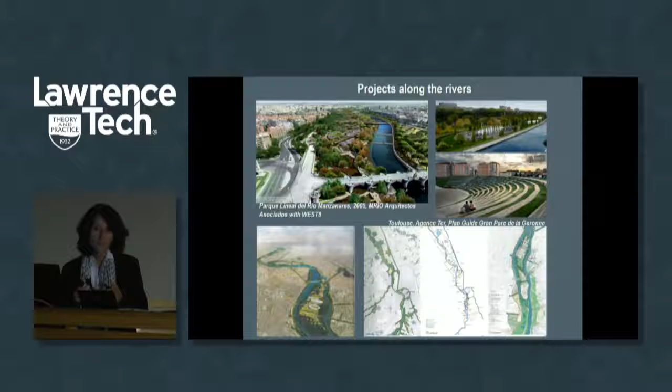They're almost finishing it. Also, the Minneapolis Riverfront Design Competition in 2011 tried to recover this question. A lot of American cities have used riverbanks for industrial settlements, and that's why now they are trying to do something different. Pittsburgh is a great example, which is why I'm there now, but all around, the reuse of these industrial sites doesn't mean just reuse of the buildings, but also of the land, which is very important.

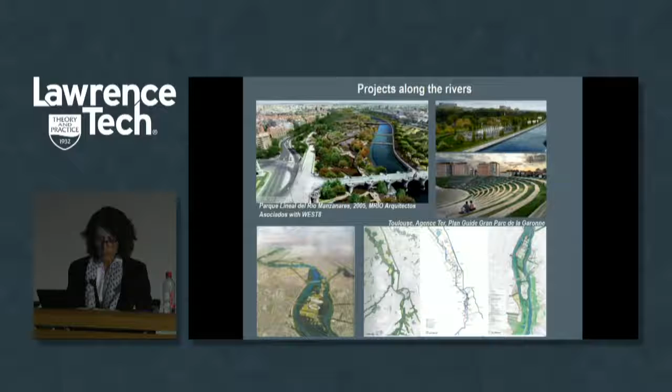Other examples - there's now an international competition called Réinventer la Seine, on the Seine in France, the main river of France. They have 41 sites which are online now, happening this autumn, and these 41 sites along the river are an occasion to work on it. They call groups - competitors, architects, but not only architects, also landscape architects, economists - putting people together to try to solve some problems along the river, like industrial sites, parks, infrastructure, things like that.

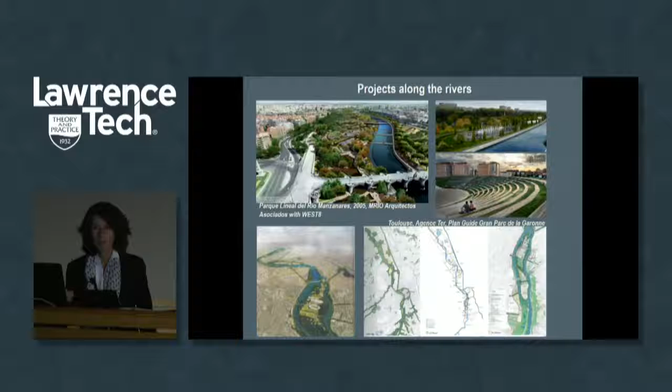One big example has been the park of the Ruhr in Germany, which in Europe is well known - I don't know if you know that. This is a huge project that has been going on for like 20 years, which really transformed a region that was a huge industrial region, and now it's really increasing and is even good for, I would say, tourism. A lot of tourists are going there, and the landscape has changed a lot.

So, where the work I've done is in the region of Piemonte. Where is the Piemonte region? There's some basic geography for me, but I know it's different for you. We are just beside Milano, northwest, beside the River Po, our major river in Italy.

Some pictures to show you how Torino is - this is our region, on the right side you can see it, and this is the main geography. Torino, the town itself, is now 900,000 inhabitants. The metropolitan area, before, with Fiat, we arrived at 1,100,000 - sorry, 1,100,000. But the metropolitan area is more than 2 million people, and for us, metropolitan area means all the small cities that are around Torino. This is on the map - you can see just Torino, but with the metropolitan area. We have the hills on the right side, and the Po that is on the right side, and now we'll show the other.

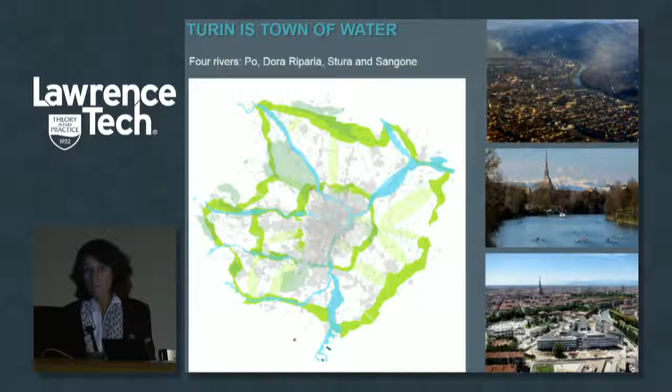This is the system of the green system, and what's important in Torino is that we have really a whole story, I would say. We have a big system of parks - you can see in the map these wonderful castles that were the king's place to go to hunt in vacation. On the top you can see Venaria Reale.

In the last 20 years - you have to imagine Torino was considered an industrial town, so nobody cared about the heritage, it was not so important for us. Everybody came from the south of Italy to work. The Venaria Reale you can see now - it's like not Versailles, but kind of, really big with all the gardens restored. But it was abandoned. There was nothing there, nothing, closed.

With that, we changed a lot. Now it's a UNESCO site. The one in the middle is Palazzina di Caccia di Stupinigi - it's like a small castle for the queen and the king. This was property of one of the main hospitals of the town. And down you can see the River Po.

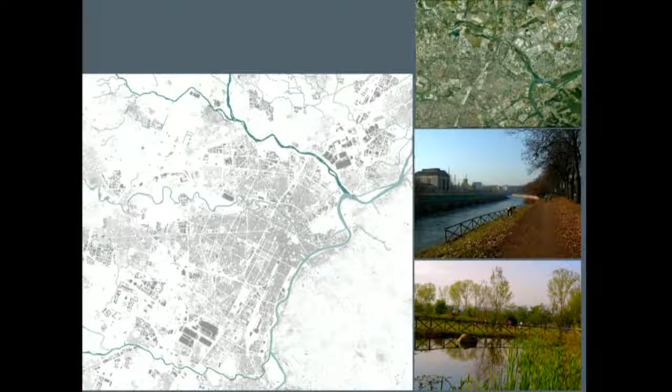This is really the figure ground map of Torino, where all the rivers are very clear. On the top you can see the Stura, after in the middle the Dora, and down the Sangone, on the right side the Po. Everybody's going to the Po.

You see here, for example, this is the map of the north part of Turin. This is the Dora that is inside the town. And this is along the Sangone River that has an urban part, but also really a part that goes into the countryside.

This just to explain you a little bit about the town. Torino is a Roman town with a very simple street model that has been transformed in the medieval time, not too much, but what was very important for us was the 17th century and the 18th century.

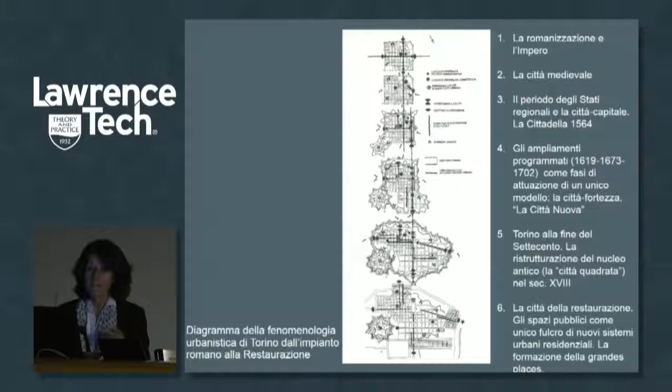So the Baroque - from the city it becomes like from the citadel, that is in the 16th century. The extension programmed in 1619, from then until the beginning of the 18th century, this became the new town Turin for the king. The king was the king of Piedmont and Savoy, part of France.

But you can do the expansion of the city until the restoration time - that means after Napoleon. Napoleon came in Torino, so he destroyed all the fortification, of course, like in all the towns in Europe.

This is the Baroque period, in which you can see the relation - the town was very small, and all the parks that now you have seen in the other map, they are close to the town now. They were far away then. They were in the countryside.

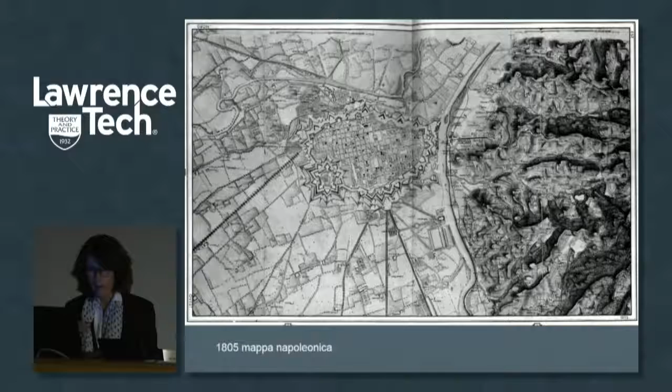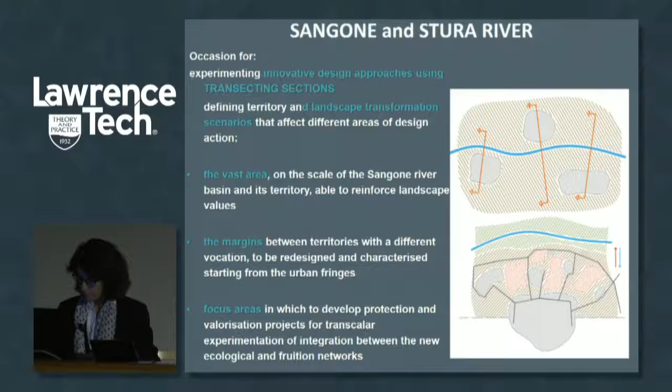So this was an opportunity to study some complex dynamics at landscape, urban and architectural scale, and of course experimentation with the two scales that we discussed already.

This is just to explain how complicated it was, because this governance tool was promoted by the province of Turin, which has a provincial territorial plan. So we have a comprehensive plan, and after that a territorial plan at province scale. But the law changed last year — we don't have provinces anymore. The biggest provinces in Italy are transformed into metropolitan areas, so the borders are not like they were before.

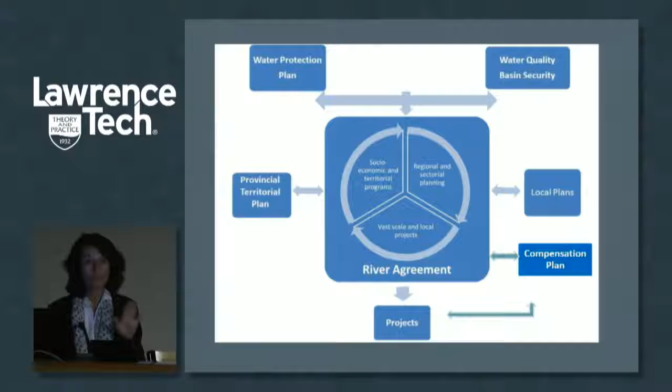So you have this problem: water protection, water quality, basin security, and the local plans all together need to be discussed. Now all these public offices, I would say, never talk together, never talk. I don't know how it is here, but they don't talk. I went to Pittsburgh, to the Urban Development Authority, and then they have the planning office, but actually they don't talk. Also in your town it's the same. We have this huge system, but nobody talks at the same table.

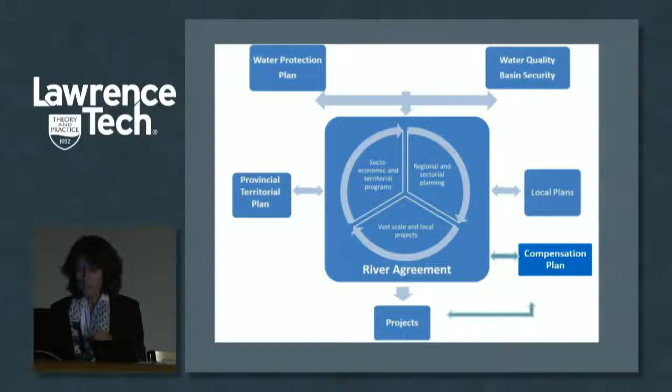This was important for us, because at the end, now we will see — so what was the methodology?

They said, okay, why don't we do a workshop with the students from last year? But there were not only architects — we had architects, and architecture and urban design students. We discussed the terminology with Philip; I know it's architecture and urban design for you, but for us it's still a little bit different. And we also had students of landscape ecology.

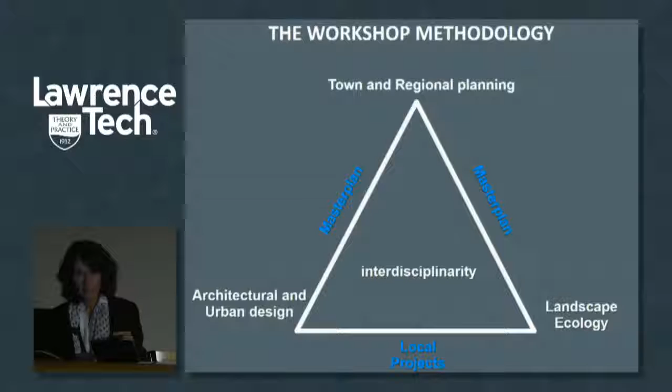Together with the town and regional planning department, we did this workshop. The tutors were me, my colleague from urban planning at the Politecnico, two professors of ecology from the university, and a tutor from the administrative office. This is a very strange thing — real interdisciplinarity, not rhetorical stuff, but really applied.

And putting together the idea of a master plan — because of course the planners will say, okay, we'll do a master plan. But it's not something that can be done from above. It's something you can discuss with the people.

This was a very long process, two years long — it takes time to talk, even in schools, I mean elementary school, middle school, high school, discussing about the river, asking what would you like to see here. This is part of the population that participated in the project too.

So these are the results. After the students participated in this workshop, they did a competition, and they had a prize from the province of Turin. With that, they had free bus travel for one year all around the town, and the publication for last year's students was very good.

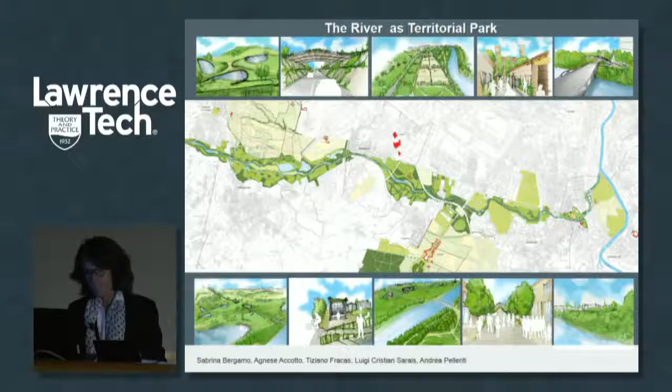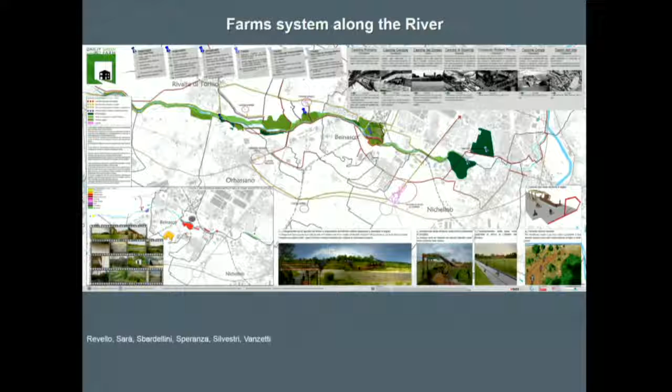This is completely different — this is the first one, and you can see all the views they've done and things like that. Now I'll just show some of them. You can also see the difference, because there were ecology students studying different subjects, so for the farm system they studied it as a park, linked together.

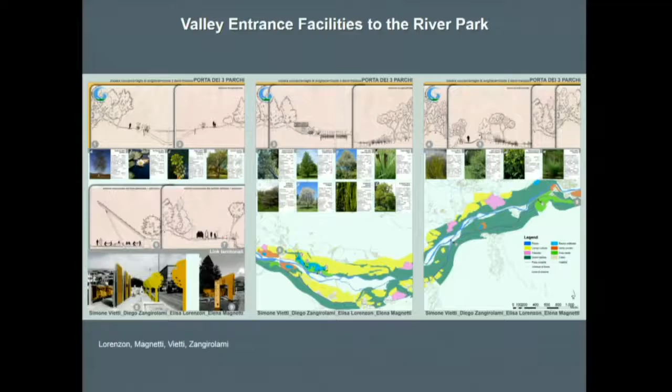Ecological network and settlements, valley entrance - that means you're entering the valley, so who noticed that? This is a community that has a different way of acting with the land, with the buildings, with everything.

These were more architects, so they studied typological studies, margins projects, like boundaries, and how to relate to the town in the last part of the river, how we can act with that. We have to keep these boundaries, or now the fact that the permeability is much more important, and in which way we have to regulate it - we have to give some guidelines for the project there.

At the end of that, they asked me and my colleague to do a master plan. This was kind of professional work, between university and professional work, because they said, okay, now we have some ideas, but we don't know how to put it all together. Things like that in our office take like 1 or 2 years. We did this in 2 months.

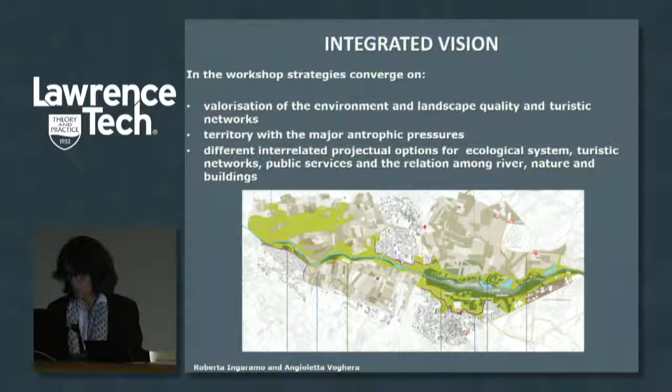We worked a lot, but this was really useful because just 3 months after we finished - this is just a part, this is the master plan. This plan, I don't know in feet, but they were 20 meters long, because the river is really long. Now you see it looks like a drawing, but it's 20 meters long with all the details inside.

What we actually did is not to say it's finished, but to say what is done, what can be done in the future - so open discussion also.

When we finished that, some of the small towns around the river received huge financial aid from the European community for another project that had been going on for 10 years, called Corona Verde - a green boundary around Torino. And they just wanted, you know what's normal in European communities - this inquiry, they wanted some answer in 3 months.

Okay, who has a project? Who wants the money, like that? So the small towns that were near the valley, they had a project. They were surprised. There's one mayor of this town that now, when he calls me, it's like Jesus Christ for him - like, you saved me.

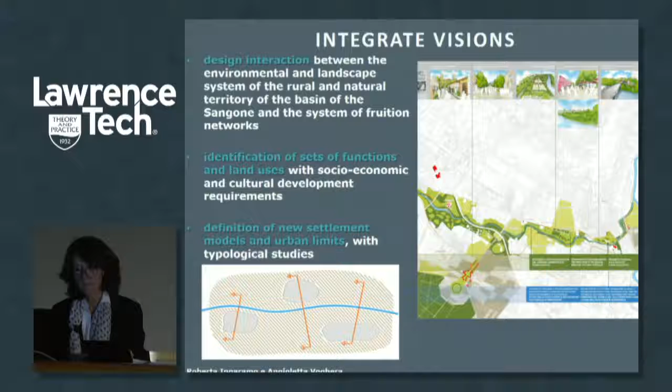This is just the implication of the work. So we integrated the vision, design interaction, identification of sets and function and land use, definition of new settlement models and urban limits, defining a complex strategy of end projects.

This is a question of how important the strategy is. So what we use is this integrated multi-scale project - we call it that, it sounds good for us - based on integration between the disciplines of architecture, urban design and planning. Not the planner on one side and the architects on the other, but together we try to do that.

With no scale limits, so the scales are connected and we can apply to extensive areas, and we try to overcome the hierarchical vision of planning and urban and architectural design - before you plan and after there arrive architects. No, it's not like that. It doesn't work, because if the planner does the plan without thinking about the architecture, it's going wrong. I mean, architecture is also urban design for me.

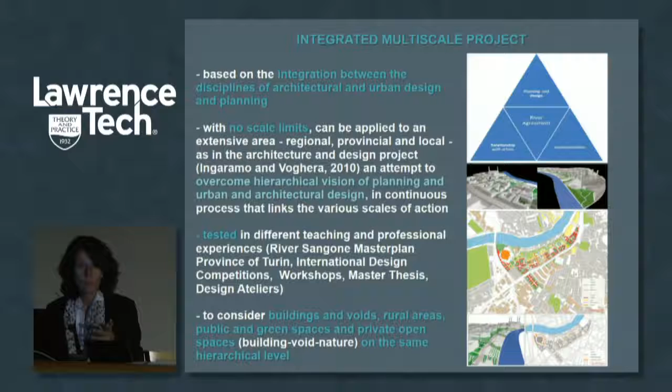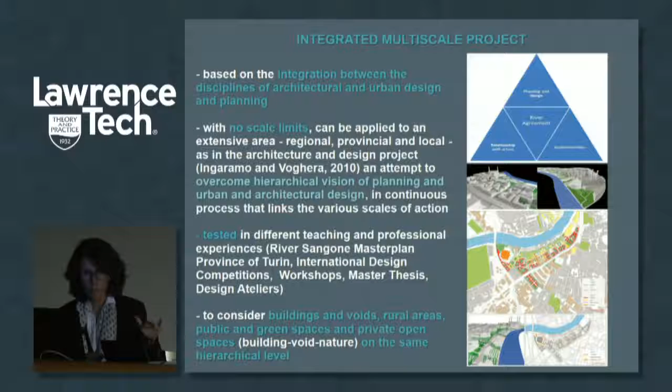It's wrong, the process. And another thing, we tested this in different teaching and professional experience. Now I will show fast because time is passing. One important thing was to consider buildings and voids, rural areas, public and green space, and private open space on the same hierarchical level. It's not only architecture first, where we are the architects and we do our thing, and the rest, I don't care about it.

But what I noticed also is in Pittsburgh, you do a project, and after that you just do a little bit around it, and then the street - who cares? It's after, no? Here in Detroit, the situation - today I went around and I'm really surprised. I knew already, but to see it is different. You have so much land that it's going to be hard for you, and I don't know what you're going to do - really, it's very difficult.

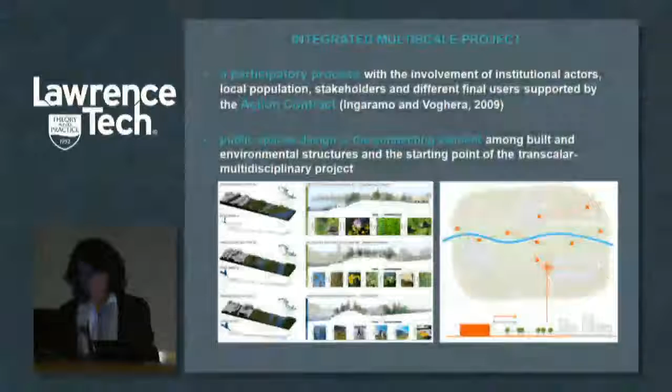So it's a participatory process. Public space design is a connecting element - it's very important. So we use two tools. Which one? The action contract.

There is a participatory planning instrument useful for supporting the public and private decision-making consultation process. Put together not only the public, but also the privates. We discuss together, we try to do a contract between us that is voluntary, of course. It's not prescriptive, but it says something.

And transecting section is like a tool, really operational, that's used to correlate various elements - also because people who are not in the field also have to understand.

This is a bit of re-examination of experiments like Patrick Geddes, valley section, and transect planning. Different, of course, completely, but I put that just to suggest where it's coming from, which literature.

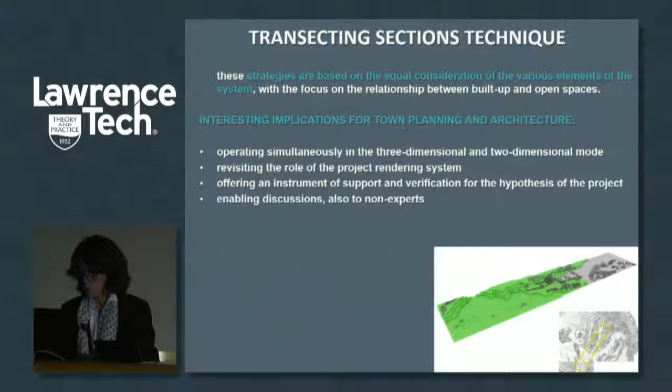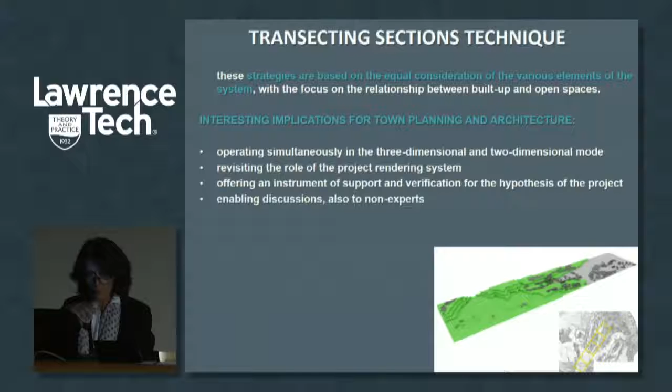The transecting section technique revisits the role of the project rendering system. You see not only the buildings, but all the land, the section, and the relation between the parts, offering an instrument of support, verification, and enabling discussion, also for a non-expert. They see how it was before and how it can be. You can change things, discuss and change.

So the method—now I'll show you some experimentation since time is passing fast. This is an ASP project, meaning we have a special school between Politecnico di Milano and Politecnico di Torino, in which 90 students apply each year.

They are the best, they have to be the best, they have to have really high marks to get in, from engineering and architecture. And this engineering means also economics engineering and all this stuff. Architecture, design, landscape—together they do special projects.

There's some experimentation on that, so they did different things, like experimenting on evaluation, and also waste treatment. They try to assess the sustainability of the projects, or waste treatment, or a valorization platform. I know for you the term valorization isn't useful, but it means adding value for us.

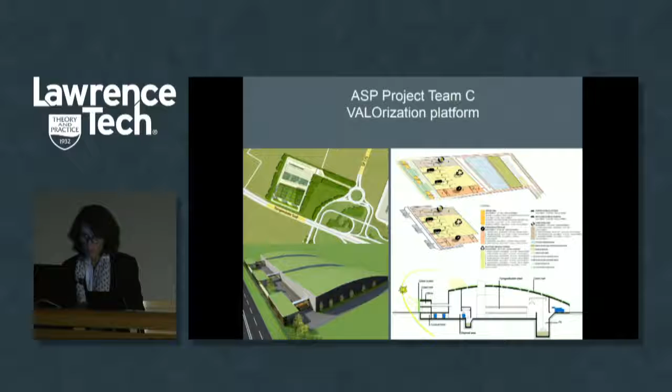All these courses are in English, the teachers are in English, they come from abroad, and they do projects and courses. It's very interesting.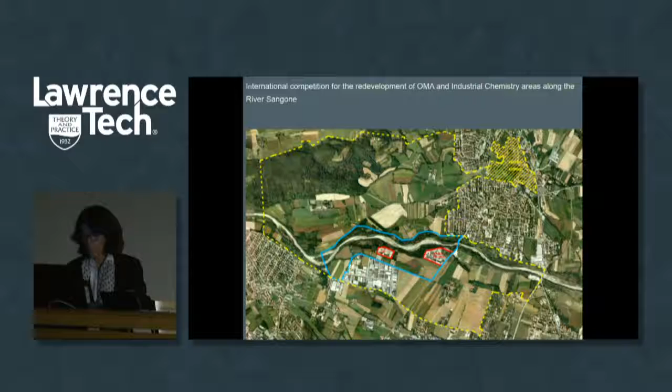Another thing: this is an international competition we participated in, myself and my colleague, just because it was on our topic. These are the drawings for the competition that the administration gave us. It's a really huge area along the Sangone River with industrial sites and agricultural land.

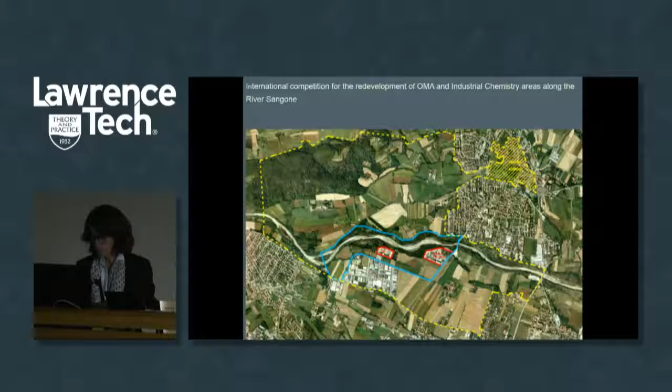That land just hasn't lost its value over time. This is much more technical—these are the drawings, and we won the prize for that. Of course the money was just for the cleanup of the area, so they start from that, but perhaps in the years they're going to do more.

Actually, what we did here—this project was called EIDO 2050, meaning 'eido' in Greek, which is like 'I see the vision' of 2050. So different phases of how to transform, starting from the history, recovering this huge territory, one in the north with the agricultural park.

I discussed with Philip about the term—yes, it's a park in which there is agriculture, but with administrative boundaries, special definitions, and perhaps tax discounts, things like that.

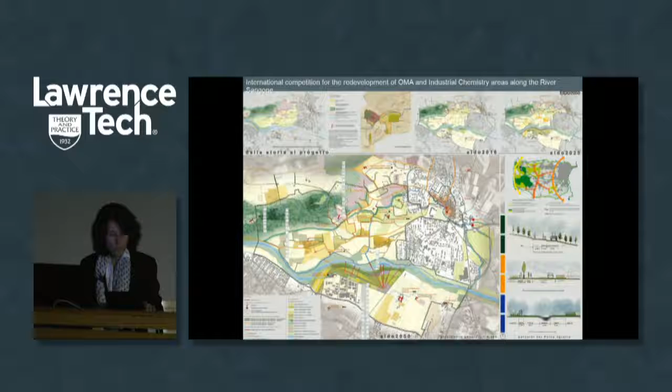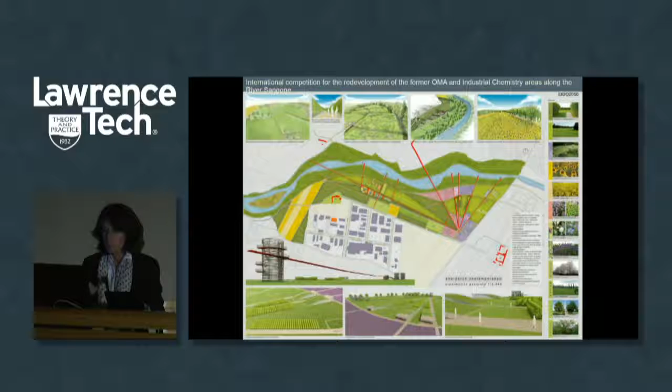And on the south, not another park, because that's too much—we can't do a park all over, but we put a new eco park. It means the industrial site renewed, not with gardens, but cultivation for energy that can be used for energy. We also put new industry in the existing industrial site, shown in red on the plan, where you treat these things.

It just becomes an educational function too. These are the concepts of the project, and it was very good, but with little money, so that's what happened.

These are a lot of workshops we've done with students, outside the university and inside it, because a lot of towns and small cities ask us to come discuss this topic. This is important for me—it's related to the thing, so we really arrive at architecture.

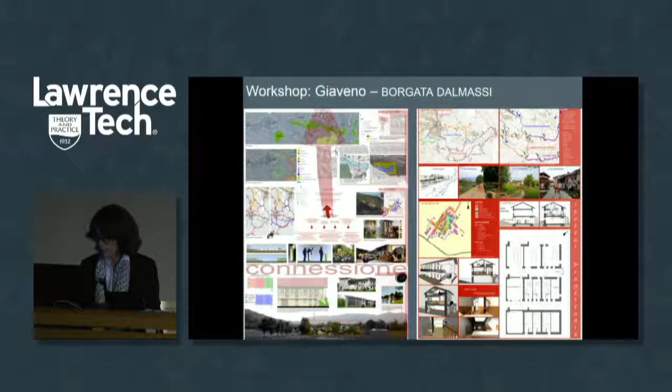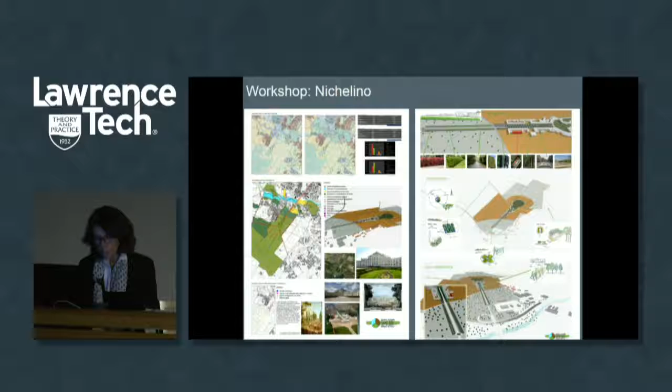For example, this is a small town—they wanted to do what's called in Italy an 'albergo diffuso,' reusing old buildings for bed and breakfasts and things like that. Or an old building the administration owns but doesn't know what to do with inside. Or near Stupinigi Castle, where they didn't know how to use the land or how to enter the castle, involving the agricultural system and boundaries of a small town nearby.

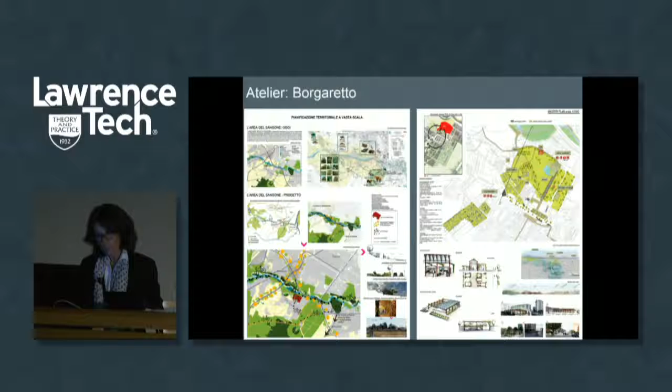So with all this stuff, we made a book. Afterward, we continued in another experience at the STURA, in the north of Italy, where we did a new international workshop and some conferences. Philip came also to discuss, and he was in the jury of the project.

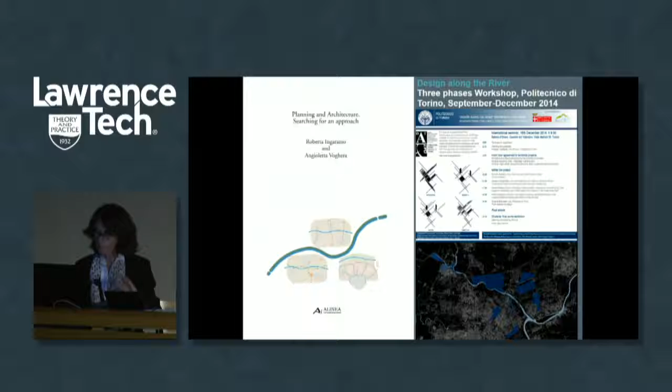And you see the difference. In the north, up there, you can see the master plan for the SANGONE. We didn't really do a master plan; they asked us to do parts of the projects, mostly working on the urban part of the river, but also on the mountains where the river comes up.

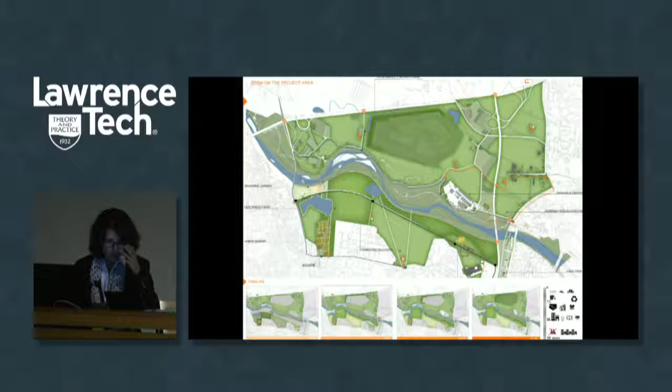These are students, really students' thesis work. They worked on that, so you see the timeline - again different phases. These are long processes; of course you could do it in 10 years, but with these, it's impossible. These are all the master plans, the big ones, in different stages.

So I'm showing you this because I don't know how much time I have left. I prefer to go faster, and afterward if you want to see more, we can.

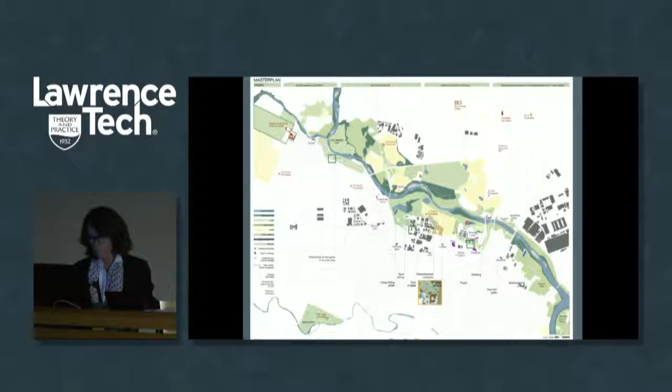In this group, for example, there were a lot of planners and engineers, also of ambientali - how do you say that? I don't remember. I would say it's a kind of engineering... not really civil, much more of the landscape... I don't know, it's not landscape, it doesn't come... environmental! Thank you very much, I forgot, it didn't come in my mouth. Environmental engineers, much more.

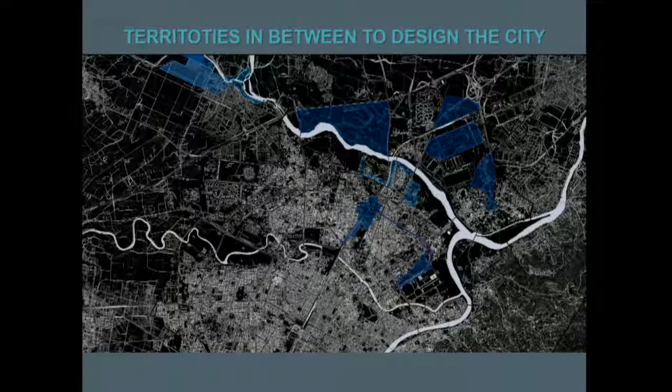So we decided to do something different. In the blue, you see all the main transformation areas of Torino. We didn't work on that; we worked in the other parts, because these transformation areas are not going on - stop, everything is stopped, they don't have money to go on.

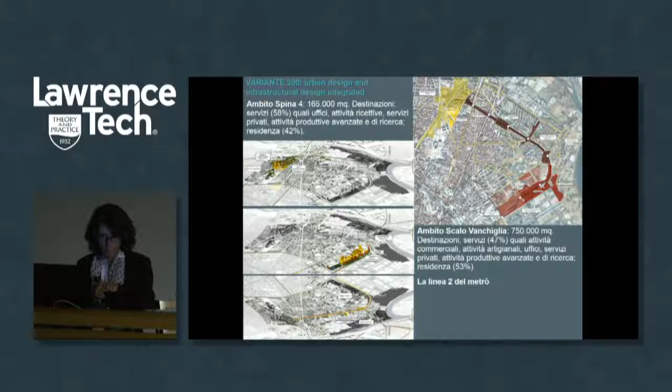There are huge transformations. For example, this is called Variante 200, meaning variant 200 of the general plan you saw before, in which there's a new underground line and a lot of buildings. It's been years, but it's still not going on.

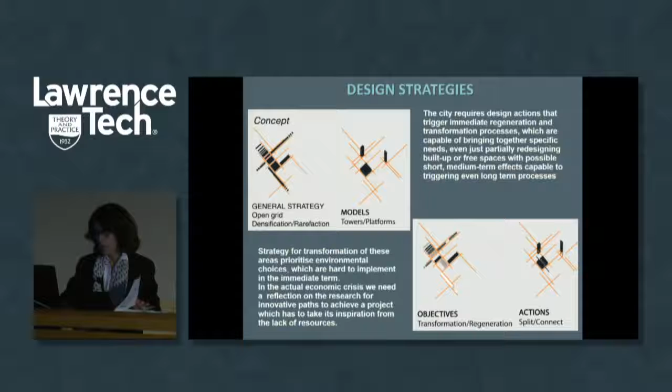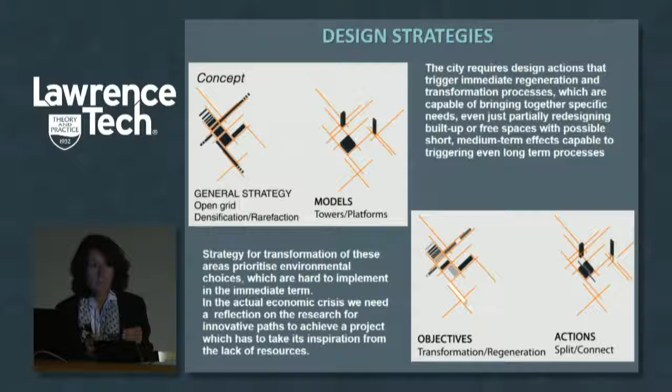So we tried to do some design strategies to figure out how we can work with this - actions that trigger immediate regeneration, a transformation process, not something that takes 30 years. Starting from smaller actions, like Detroit I saw today, where some parts are changing just because a restaurant is going to change that area. Perhaps one restaurant, then two, three, four - a small project can sometimes be much more useful than the general projects.

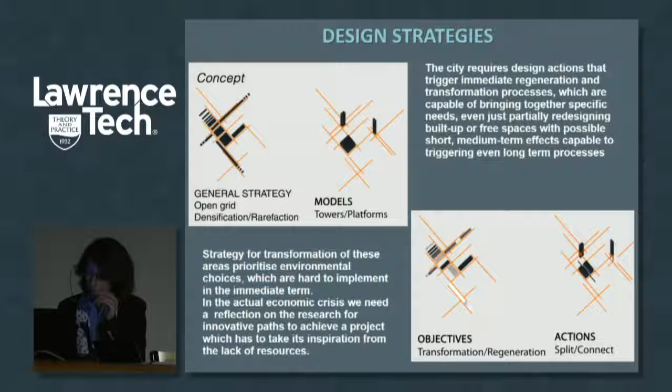So with design strategy, one approach was starting from density and lightness. If you know 'Habiter le Grand Paris', this is very interesting work that Paris has done, in which LIN, for example, said the lightness is a value - it's worth much more than being dense. Of course our cities are really dense compared to yours; Detroit is really sprawled all over.

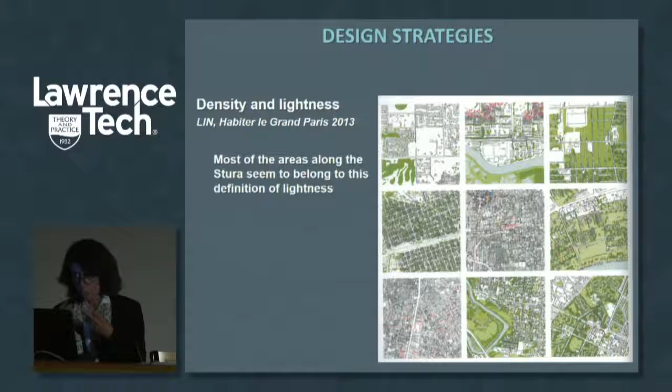It's too much, but for us, when related with the river, it's about permeability and how nature can come into the town. Nature, as I told you before, isn't really so much nature anymore, but it can become an occasion to work on public spaces, to work on a kind of architecture that is related with it.

So these are some of the projects - we also worked on the borders of this part of the city that is much more similar to yours, with industrial storage and huge commercial buildings, with a few residential buildings built beside the commercial buildings. So we tried to think about what to do with that.

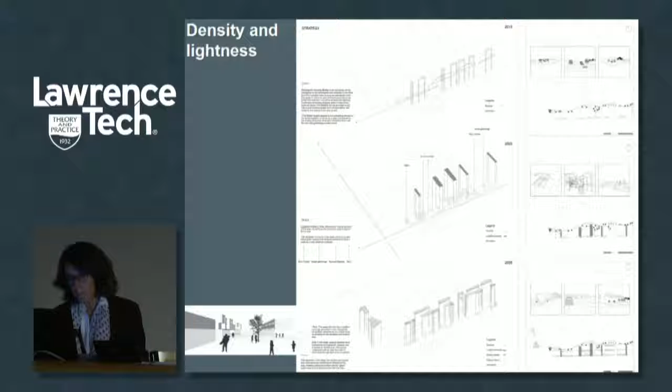So with the different phases, we started also to work with the logistics industries and kind of different - I would say not technological clusters, but... at this time the Polytechnic of Torino is now in the first 50 in the international ranking, in the world.

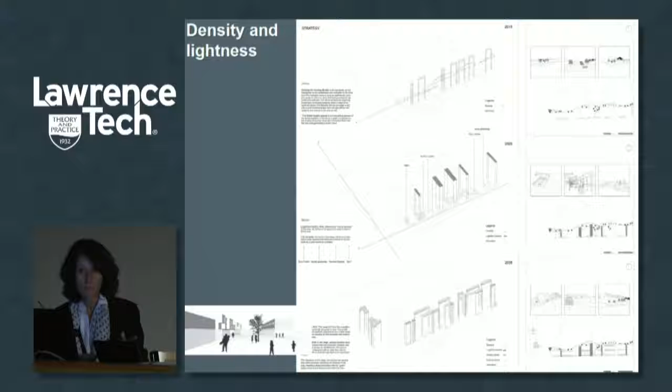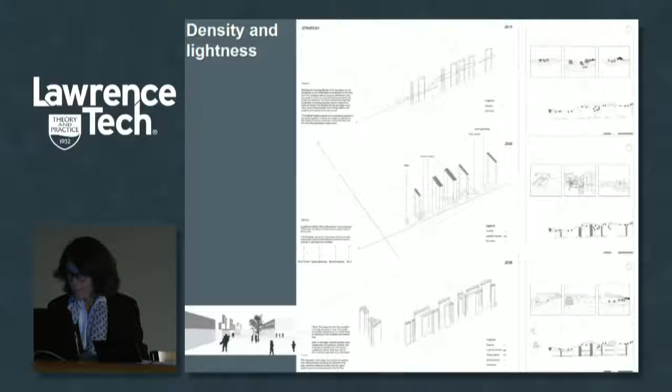So becoming really better. In some subjects, for example mechanical engineering, we are really in the top 10 in the world. Architecture, we are in the 50, in the first - we are getting better. We're just fighting with Milano, which is better than us, but it's a political question, I think. And I think in the future we will be a research university.

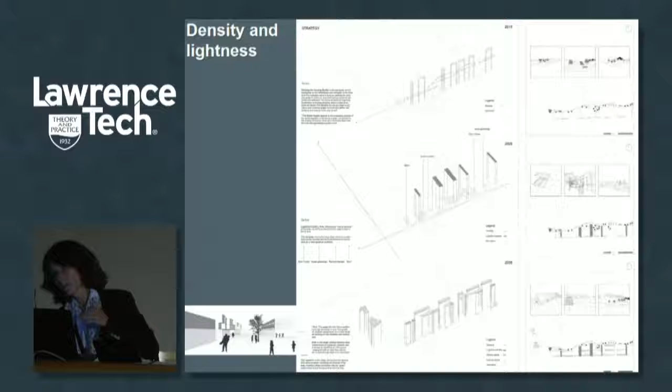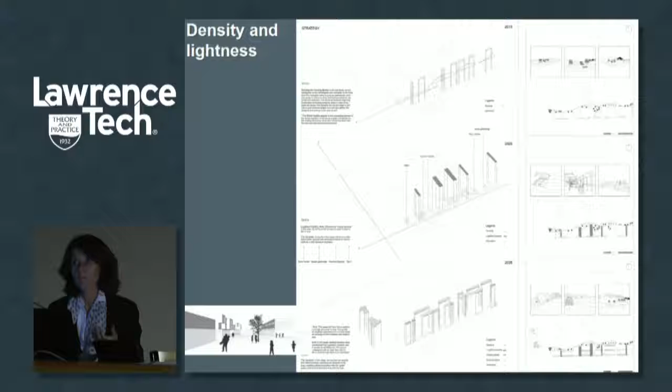Also in Italy we're moving from our system to kind of your system, starting to have some universities become research universities, and others that are going to be teaching-focused like yours. So I think research universities in Italy will be really few, like the Politecnici in the north, like Rome's La Sapienza. Venice is going to be something strange because it's really a cultural place, but it's not very good in the ranking, though the professors are really good, and we work together. The north part of Italy is a huge university system, kind of.

Milano and Torino, with the fast train, is now 1 hour, but in 2 years it's going to be 45 minutes from the center of Torino to the center of Milano. You can live in Torino and work in Milano. This is going to change a lot of things. Already now it's like that, and we have people from Milano coming to Torino, and this works a lot.

So we decided to experiment with some typological issues, in which you can see production—small, light manufacturing—and public spaces, but not places where you work in the day and it's closed at night. Places where at different times of the day you have different activities.

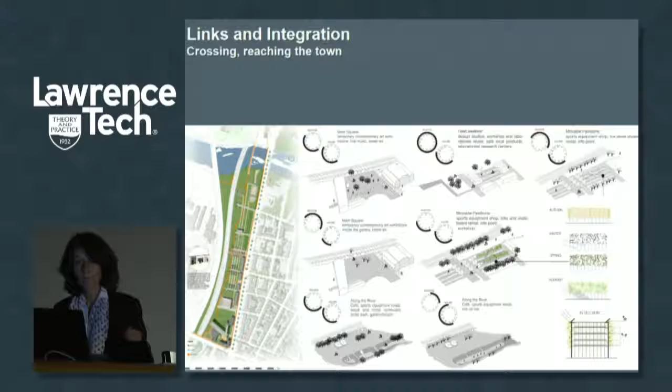We need a lot of laboratories and places to start startups. We have a big incubator in Politecnico di Torino, not like Carnegie Mellon because we're specialized in other things, but we have about 20 new startups each year, and some grow and leave the incubator to become activities. They need space. These are the links—just to show you some links and integration.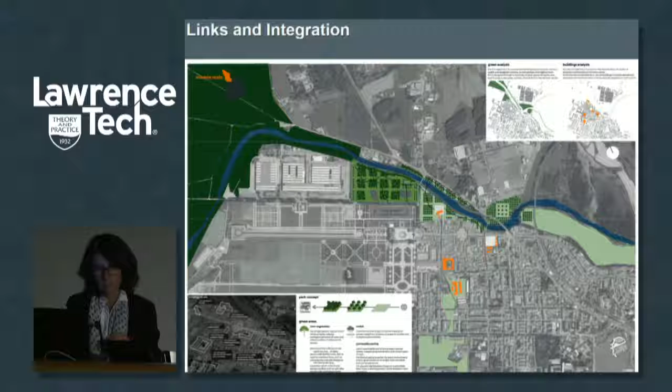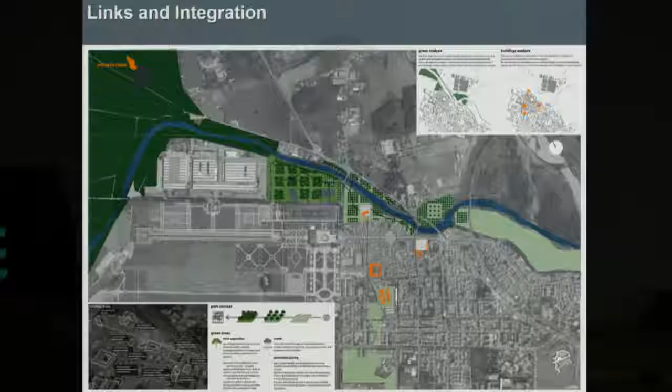The parks system is in Venaria Reale. You know what happened there? They were so crazy they put Magneti Marelli, a big huge industry, right beside the castle, as you see on the map. Now they want to remove it, but it's difficult to just say 'go away.' It's not possible—it's very difficult. But in the future, the idea is there won't be industry there anymore, because it's going to change.

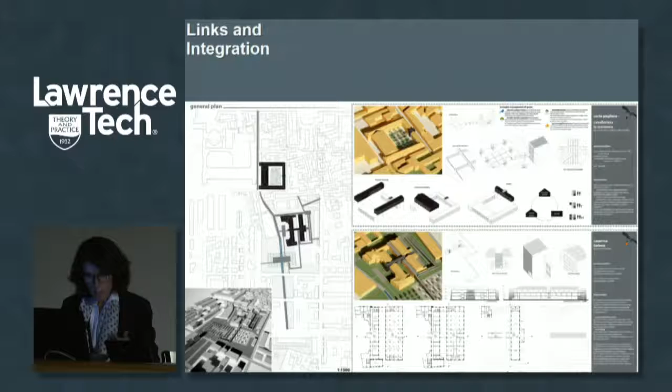So the idea is how to draw this system—the green system going inside the town to link the public spaces and public buildings that have to be renewed and reused in different ways. Here the park can be just a park, or it can be used together with buildings.

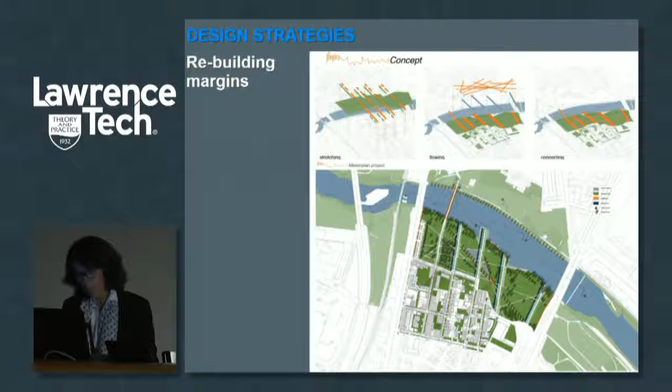This is an industrial site—not really industrial, more like storage and small industry—and you see the transformation. There's a stream here; the stream changes through the months of the year, so the dimension and the water have overflowed a lot in the last 10 years, twice. This is also a real ecological problem.

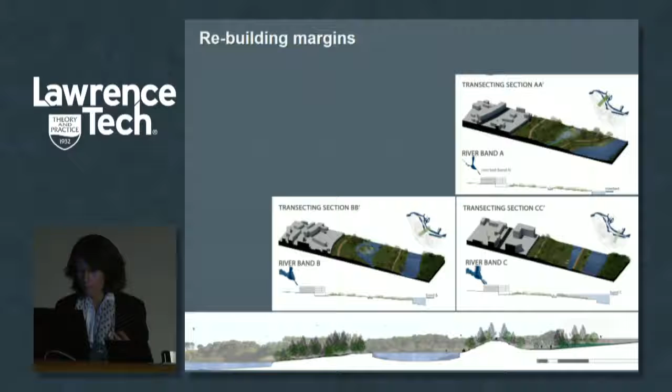We have this problem all around Italy. We don't have only earthquakes—that's another big problem—but we also have rivers overflowing, for example in Genova, in Liguria, every year. This is because we've built up along the rivers and streams and didn't leave enough space. It's not like here, but this is something that has to change.

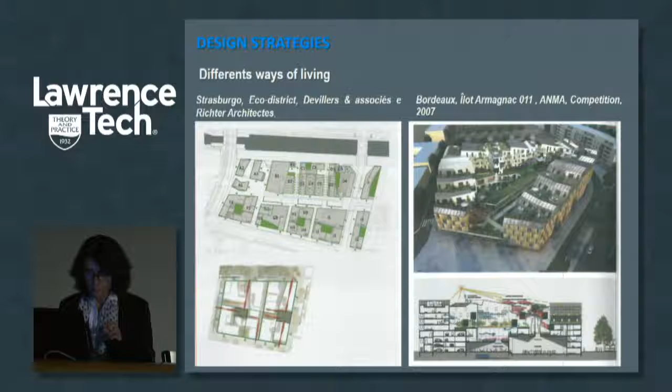These are some examples of rebuilding margins, also a different way of living. Now, especially young people—I hope you do too—don't want to live in a place that's dynamic only in theory; they want to work, live, and play there. You say 'work, live, play' here in the States, but it's not so different from what we want, and we need to talk about that and try.

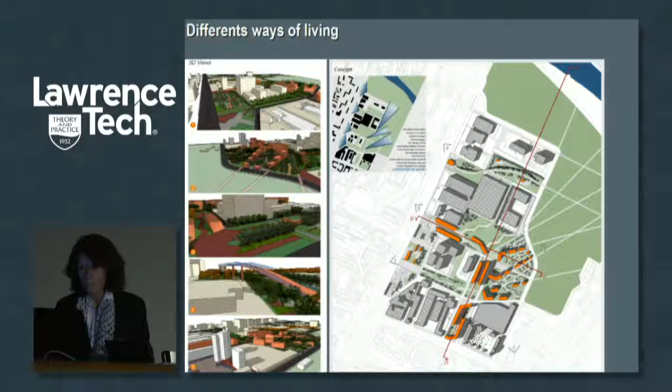So here we try to put some residential area inside this storage or huge building, which can also be open space for arts or performance and different things, or small startups alongside small buildings. This, for example, is a creative hub designed for the valley, where you can find all the information.

But you can also control the landscape quality and study how to control it, so you can put all these things together.

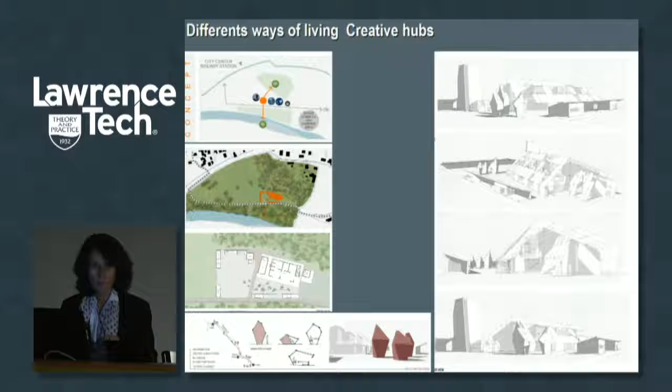Not only restaurants and bars, but exhibitions and all things integrated with new technologies, in a way that is related also with the context. So what I'm showing you is different scenarios of industrial sites, small or production, with a square, and you have a pavilion that can change during the year, during the months, and even during the hours of the day.

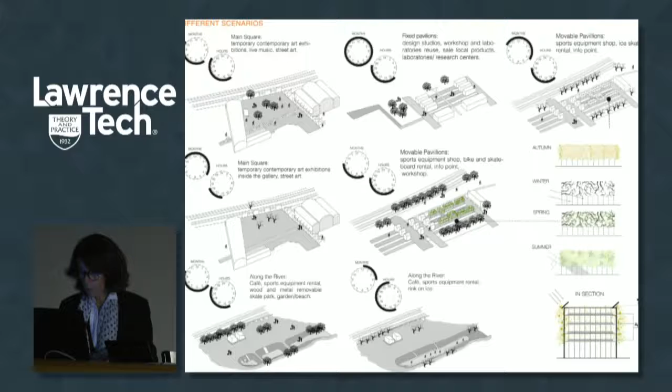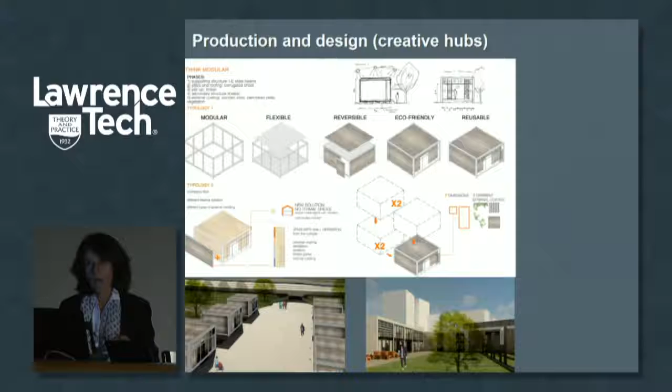For example, we have a lot of adaptive reuse of industrial buildings that are now becoming co-working spaces. This is really famous now in Italy, even too much—everybody goes there, it's very co-working and very cool. Production and design, so new buildings, small technological elements that you can throw away when it changes because time moves so fast, and you have to change how to use this space, not the same use.

These are the examples, I'm almost finished. So, sorry about my language, but what is design? For us, it's a tool within the decision-making process for selecting elements and values, and for developing and explaining a community vision for a new urban territorial quality of life.

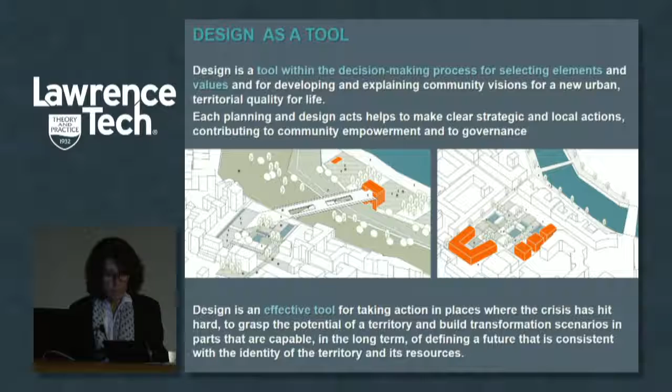This can make clear and explain things to local actors, but also to non-experts, and contribute to empowerment and governance for the community. It's also an effective tool for taking action in place, especially in our situation where we have a big crisis, and to define a future context or vision for the territory, and to enhance resources that sometimes are not considered.

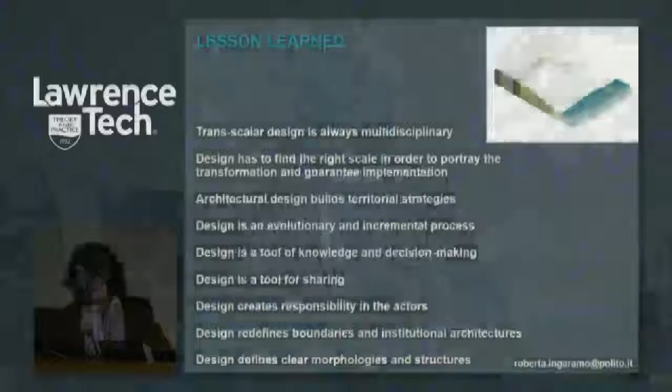To conclude, I'll put some lessons learned that I wrote in the last book coming out this autumn with Springer, in which I thank Philip—he put an article, a paper there, and we have all these international papers related to the subject. So I'll just say a few words about that.

Trans-scalar design is always multidisciplinary. Of course it can be different. Another very important thing is that the definition of the boundary of the research for design, for me and for a lot of people—other professors working in Italy too—is an integral part of the research itself.

When you start the research, you decide which is the boundary, which scale you have to work with. It's not possible to say beforehand, yes, you can do it when you have one building, that's all. Or you're designing industrial design—we do classes, or we do a chair. It's a chair, it's the boundary, no more.

But also, the design has to find the right scale in order to portray the transformation and guarantee implementation. So at the end, as Michel Desvignes—you know him, a very good landscape architect in France—says, in methodological terms a permanent calibration is necessary. So you have to permanently calibrate your work.

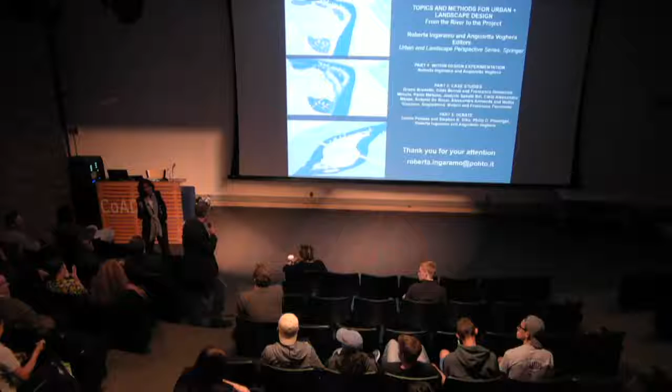No, not at all, not at all. Help me, right, help me because I didn't understand exactly. No, you're good, thank you. Thank you very much, okay? Very good, yeah.